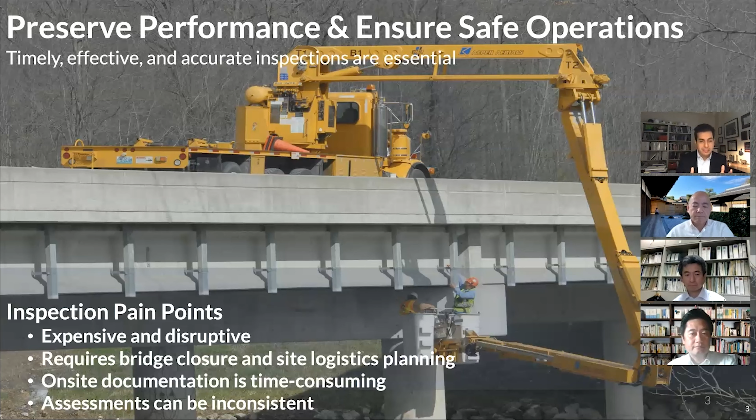The process of documentation for long has remained very time consuming when you consider that a lot of inspectors have to be an arm's length away from the infrastructure. And because of the time limited aspect that we have, and because we can't get all of our experts to visit these sites, oftentimes the assessments that we have can be inconsistent.

Over the past 5 to, I'd say almost a decade, there's been quite a few departments of transportation in the US that have led the charge in coming up with the requirements for improving this process of condition assessment. And out of that process, there are really 4 top goals that are being highlighted.

There's always a need for new procedures that can be easily standardized in terms of how you're documenting existing conditions, how we are communicating defects that we see and we analyze, and how we can follow up on recommendations that are being made by our inspectors.

Oftentimes, when we speak to Department of Transportation and with our colleagues in Japan at the ministry level, there's always a need for a unified system that everyone, no matter where they are, will be able to get access to the information, store it securely, and be able to retrieve that information over the life of that asset.

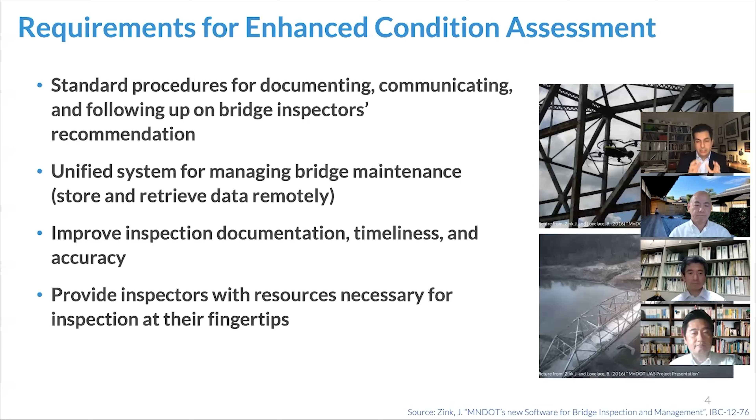Of course, many issues that we spoke about in terms of documentation, how fast we can do it, and the accuracy of the process are also pretty important to us. And on top of all that, we really want to make sure that every stakeholder engaged in the process, from that inspector to the owner of the asset, would have all the information that they need at their fingertips so they can make the decision at the right time using this actionable insight.

So what is the opportunity? Over the past decade, there's been a surge of visual data that's already being captured on all kinds of infrastructure assets. Whether you're owning and operating a bridge, whether you're engaged in the railway industry, whether you're involved in tunnel construction, there are all kinds of these images and videos being captured.

Sometimes we see photos captured with cell phone devices. Sometimes there are cameras that are being mounted on inspection cars, time-lapse photography, action cameras, and drones. Drones have been really transformative. And of course, laser scanning.

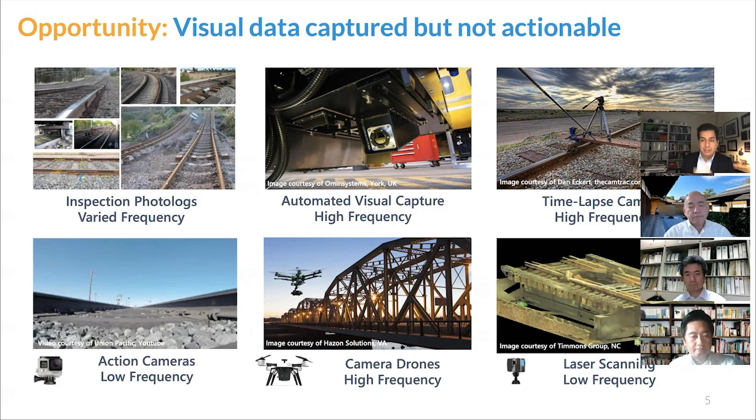So as a team, when we started working on this concept almost 10 years ago, we started looking at how we can expand on the value of visual data that we use for coordination and communication as the basis of our inspection. Among all these form factors of capture, the one that's been really transformative has been the application of drones. Camera-equipped drones are really easy to operate, and we've seen a surge of their application, not only in the US and Japan, but also around the world in many of the projects that we engage in.

In fact, Minnesota Department of Transportation, with Collins Engineers, actually published a report that shows when you use drones, you can immediately have cost savings associated with minimizing exposure of your inspectors to the infrastructure and the time that they have to spend in the field using special equipment. So obviously it's faster and cheaper.

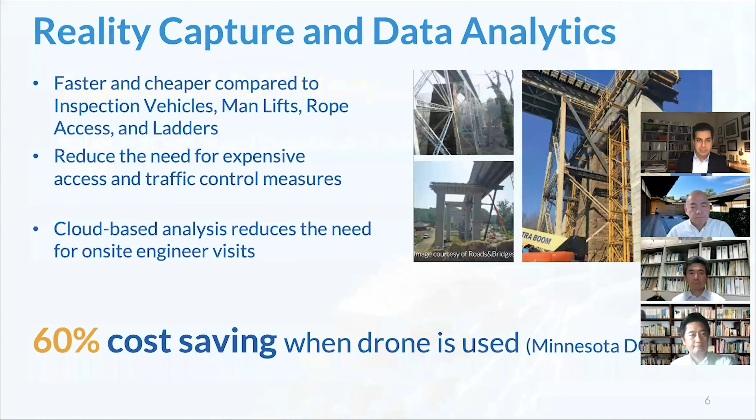It reduces the need for all kinds of access and control measures that we have to bring in from a traffic perspective. And when you supplement that with a cloud-based analytics platform, the requirement of having the engineer be out in the field would be dramatically reduced. So with all those values, we started working on this concept.

And back in 2016, almost 4 years ago, we teamed up with the Japanese Ministry of Land, Infrastructure, Transport, and Tourism to look into robotic-driven visual inspection of infrastructure assets. So with that, I want to pass it on to our co-speaker, Nita-san, to speak about their story of how the government of Japan came up with this initiative.

Nita-san? Hi. My name is Yasushi Nita, and I am in charge of policies regarding the introduction of robots at MLIT. Thank you very much for having this opportunity to give a presentation here today. Since the time is limited today, I'll focus upon the robot for the inspection of bridges. Next slide, please.

The government of Japan set up a new robot strategy in 2015 that aims to showcase Japan to the world as the most advanced robot society. This new strategy is intended to promote the development and introduction of robots in a wide range of fields, including manufacturing and related service, agriculture, nursing and medical care, social infrastructure, disaster response, and construction. Next slide, please.

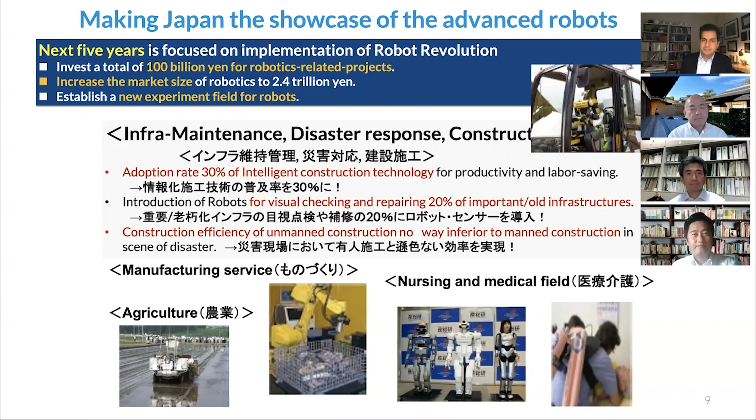This slide shows the overall picture of the project. We recruited inspection robots for 3 years and verified their functions on the actual site. For bridge inspection, we plan to certify the performance of the robot for the requirement. In addition, I'd like to propose a new inspection method using a robot to achieve more efficient maintenance management. In on-site verification, various types of inspection robots were proposed, exceeding 100 technologies. Next slide, please.

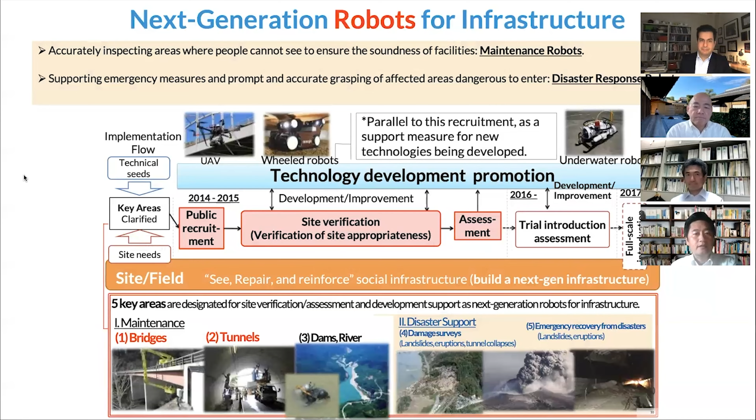On the other hand, the infrastructure of Japan is aging, and the working population is decreasing, especially in the construction industry. In the next 10 years, a serious labor shortage is expected due to mass retirement of people 55 years and older, which account for a third of the current labor force. Therefore, we think that increasing productivity is an important issue. Next slide, please.

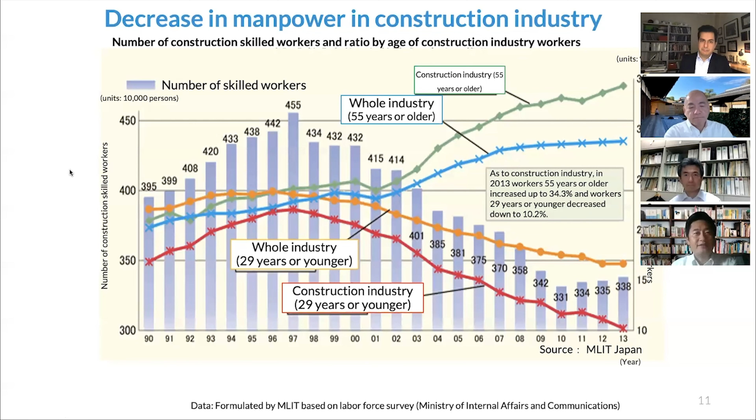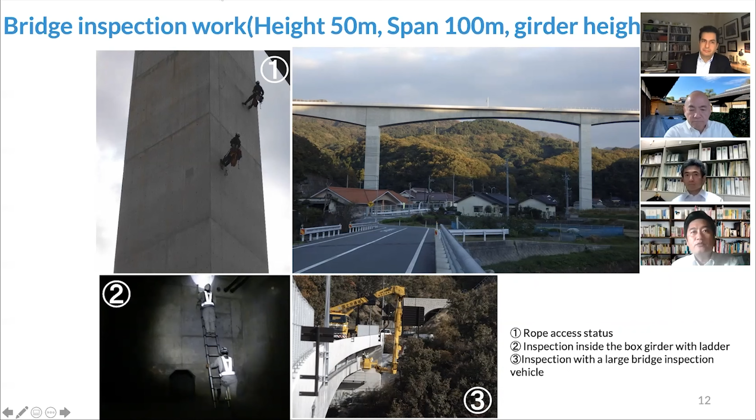This photo shows the bridge inspection work in Japan. The bridge pier is 50 meters high. The box girder also has a height of 10 meters. A close visual inspection is required for all parts. Number 1 picture shows rope access. Number 2 picture shows the inspection inside the box girder with a ladder. The third picture shows inspection with a large bridge inspection vehicle. Next slide, please.

Sorry. Next slide, please.

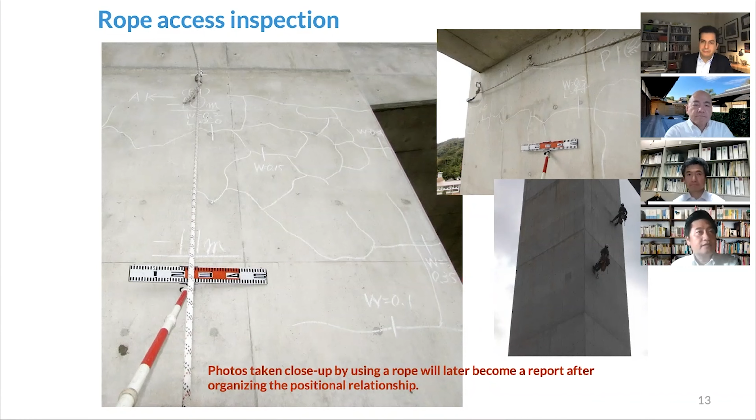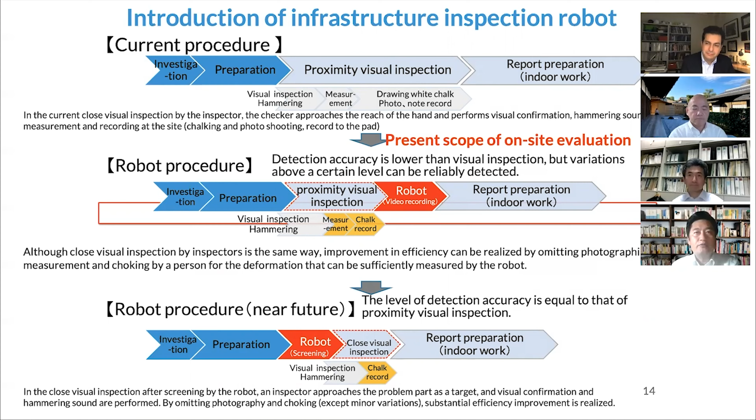The lower column represents a use case in the near future based on the robot inspection result. The person will be screened for a range of visual inspections. At this time, the bottom technology doesn't exist, but we expect it to happen in the near future. Next slide, please.

MLIT has started to include an AI budget from 2018. Inspection robots, unlike people, get a large number of photos and videos. AI can process faster than people to decipher large amounts of images from robots. In order to improve the efficiency of robot inspection, we aim to achieve high detection efficiency by AI.

Additionally, we will develop supervised data with input of experts, and we will promote the installation of an evaluation system. Next slide, please.

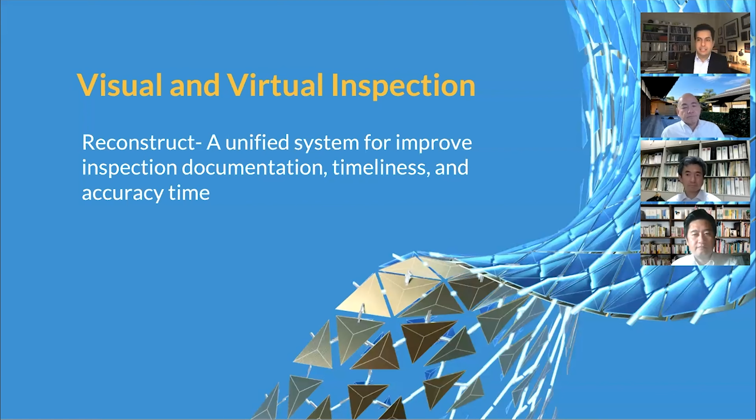So with that in mind, we started partnering with Murakawa-san back in 2017, and we had the opportunity of meeting with Nita-san in 2018 to start piloting our technology roughly 4 years ago for visual and virtual inspection. Our platform Reconstruct is a unified system that provides that process of improving inspection in terms of how we are documenting defects, the timeliness aspect of our process, and the accuracy associated with the performance that we have.

So broadly speaking, the Reconstruct platform builds on Autodesk solutions. We've been recently featured on Autodesk Forge blogs because this technology really builds on the Forge Model Derivative API capability in addition to parts of the Forge viewer. Our solution is also very tightly integrated with your BIM 360 solutions. And what that means is now all kinds of visual data can be brought into a system so they can generate a historical record of any of your infrastructure assets.

Our platform sits on Forge, and what that means is that you can also bring in your design information in 62 different file formats. Whether you're looking at your InfraWorks, Revit, Civil 3D, Navisworks file, or even 2D drawings, that can all be brought into Reconstruct, where it would be laid against the reality capture.

So basically images and videos would be automatically transformed into 3D models with a unique engine that is outside of the Forge box, the Reconstruct engine. And then it would be overlaid with the design information.

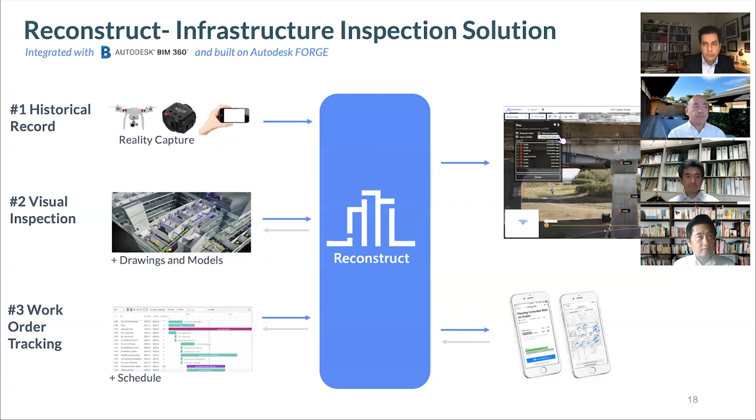And once inspection is being done, every single issue that is documented in the system can also be transformed into a work order. So you can actually tap into scheduling capability and create a work order immediately out of your inspection process. This entire system is accessible through the web and also mobile phones for individuals who are out in the field, whether it has to do with work tracking or visual documentation.

So again, when we started looking into this in terms of scaling, we immediately realized the number of bridges in the country of Japan are very comparable to the numbers that we have in the US. And what that means is that probably there are many different owners, and each owner, contractors and consultants that are working for them, they leverage different modalities of capture. Sometimes they take still pictures with their phone, sometimes maybe 360 cameras, like the picture that Nita-san showed, somebody walking into the girder box. And many times these days, we can tap into the application of drones, webcams, and scanners.

So we wanted to make sure that we can come up with a platform that is agnostic to how visual data is being captured. Of course, with guidelines, but agnostic to make sure every infrastructure asset can be documented. Going back to those needs, we wanted to make sure we have a web-based system that makes the data accessible to every party that's engaged in a project. All data, whether it has to do with the visual data, procedures, manuals, reports that are typically byproduct and or the product of the inspection process are correlated and linked. And everyone who is on site and remote, especially with COVID-19, they will also be able to get access to the information and interact with it.

So this will be a system-wide analytics capability that you'd be able to tap into to document your assets of interest, let's say a bridge. And every 2 years, every 5 years, when you're coming back, you'll be able to generate a new model, automatically have the model aligned against the previous one. So you would have a 4-dimensional reality model, fourth dimension here being time. And so that report can be organized around work locations automatically in a 3-dimensional scene.

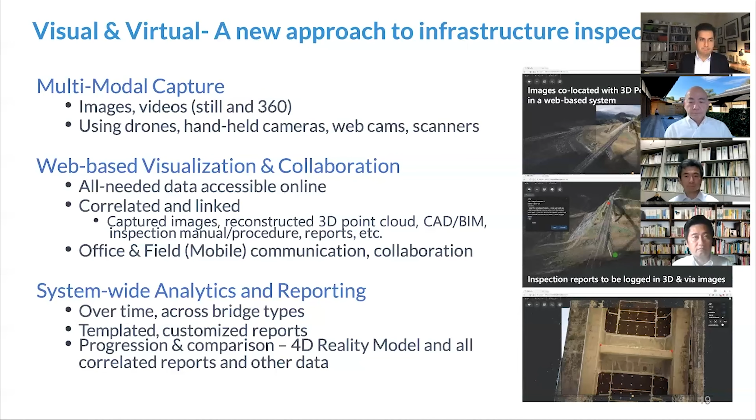So with that in mind, we extended the capabilities of our engine that can really take in unlimited amount of images and videos, and the form factor doesn't really matter. As you'll see in our handout, this engine can take in some drone pictures in addition to maybe some pictures that would come from a 360 camera or a combination with a video. All that would really result in a three-dimensional scene, a point cloud and a mesh model, and also 2-dimensional orthophotos.

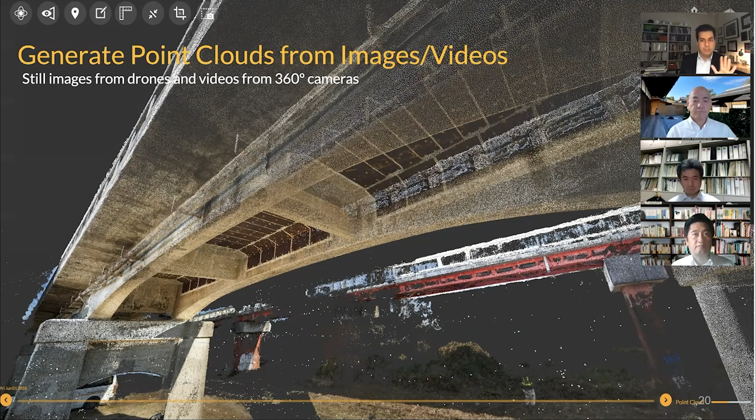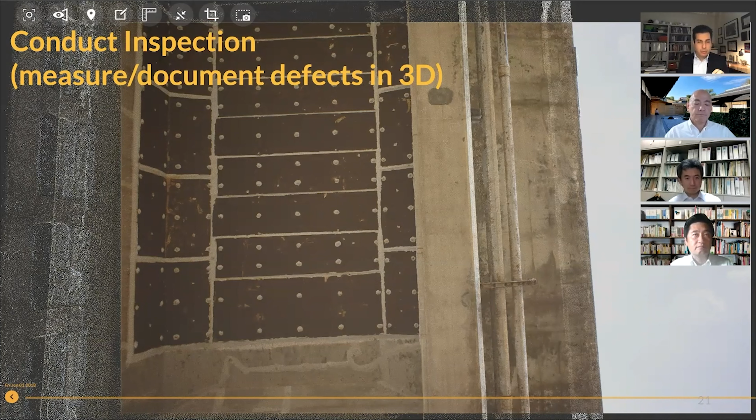Orthophotos that can show you top-down view, bottom-up view, side view, or you can create cross sections to generate these views. And what that means is that now you can click on any location you desire. The system would automatically bring the most relevant image. And now you would be able to dive in and perform your measurements in a three-dimensional scene from that picture of interest that you're looking at. So let me show you this video so you can actually see how the system really interacts. And I'm going to pass it on to Fukuchi-san in just a moment.

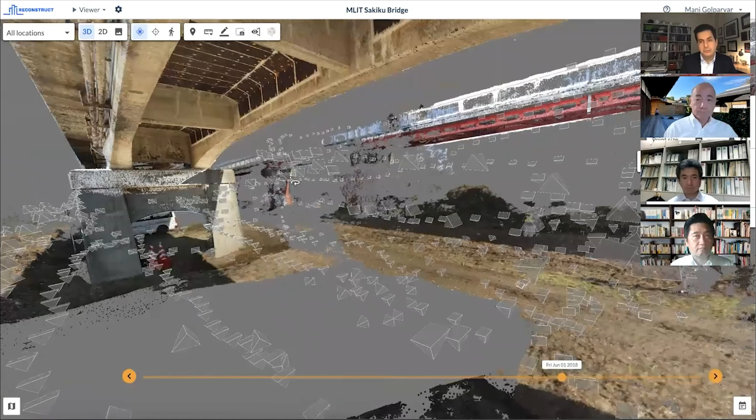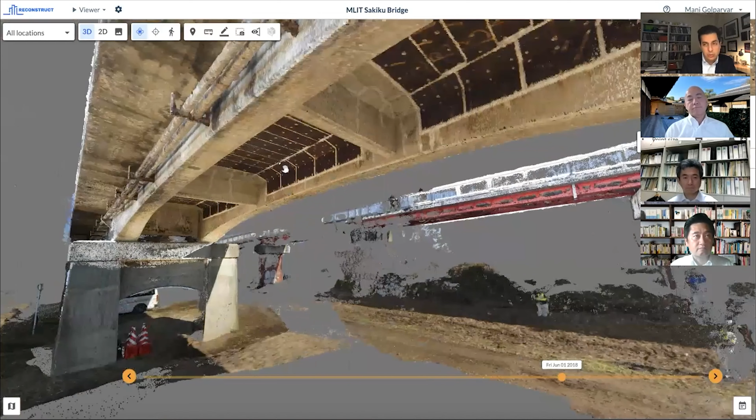So what really happens is for every bridge, we provide guidelines for inspection. Under the bridge, sides of the bridge, any location of interest will be documented. All these images are being processed into Reconstruct engine, and they automatically generate that point cloud, the mesh model, and the orthophotos that I referred to. So now the inspector can actually log into a visual system, and within the visual system, you can click on any location you desire, and the system would immediately bring in the most relevant image for you.

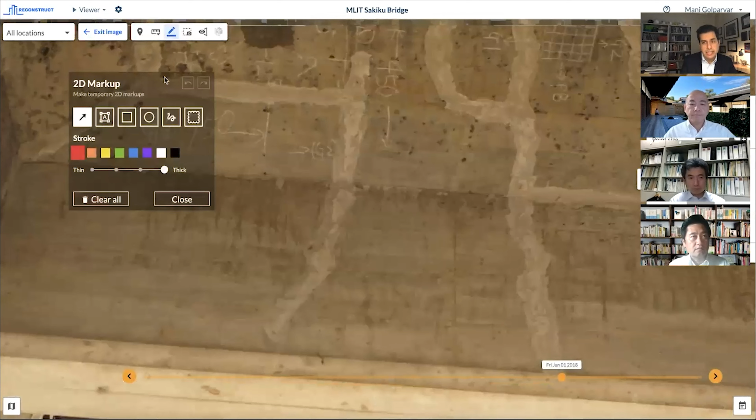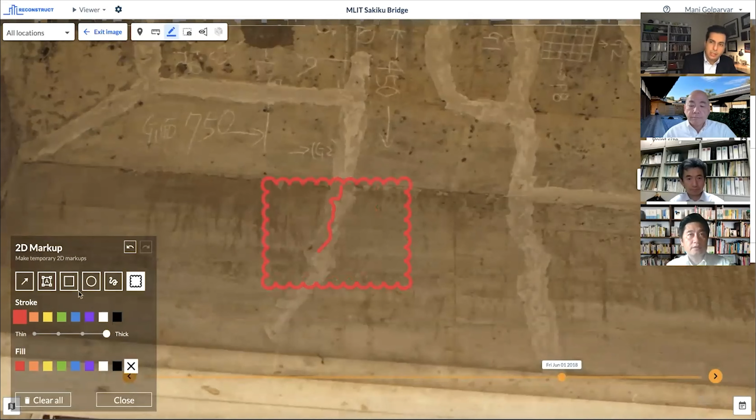We've actually posted some guideline in our handout that we developed this technology, making sure the measurements are really accurate. The requirements for inspection accuracy is usually millimeter or sub-millimeter. And what it all means is that we also need to make sure markup capabilities are done. So we've tapped into some of the Forge capabilities to bring that data into the scene. The challenge was really interacting with the point cloud images and design data, so some novelty on what is being built on top of the Forge viewer here. So all that data, again, enables you to perform your measurement in a 3D scene.

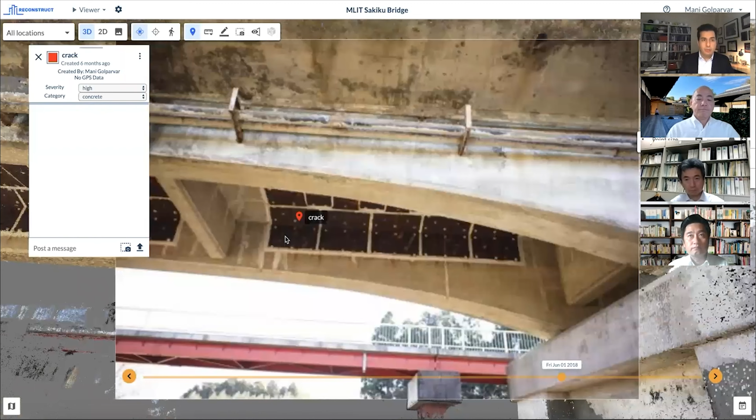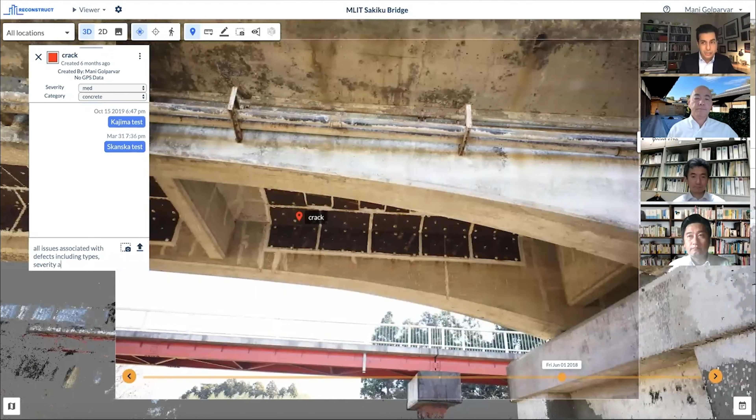When you perform your documentation, you can create custom forms. So you can say who's created that inspection log, what is the XYZ if it has GPS data, or it doesn't have GPS data, and you can have customized forms that can say how many types of defects have been detected, what type it is. In the case of MLIT, 26 different types. And then you can also associate severity. There's a console that you can document information associated with that. So it's basically inspection logs, recommendations on how that issue can be addressed, or it can be a platform for communication that over time really shows you all the logs of communication across various project stakeholders.

Once this process is complete, you can also attach reports, manuals. So again, all your inspection data can be localized against one location in a three-dimensional scene, and anyone coming back in the future can easily click on that location and all that information comes back. From every issue you document, you can immediately create an activity from a work order perspective. So it really creates that schedule of systems and you're able to use that.

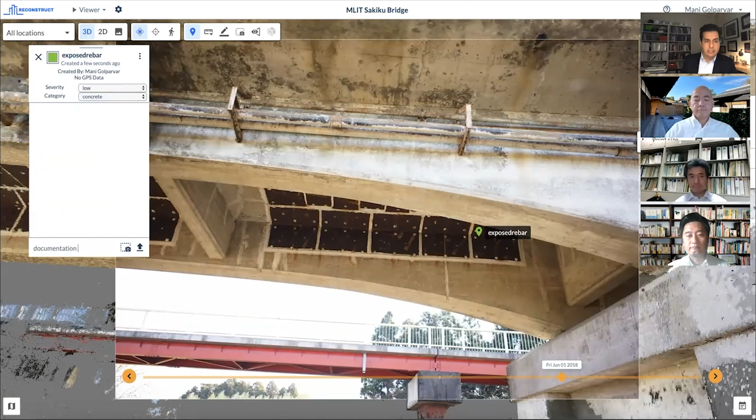So again, pinning would be, you click on a location. If you have a list of default types of defects that you want to be detecting, you can grade that, and all that would remain in the platform. So that being said, we worked very closely with MLIT and some of our partners here in the US to devise a workflow that we can gradually introduce this capability to scale. And this has actually been used on hundreds of projects already.

And what that means is we need to have proper guidelines on how visual data can be captured. In the case of MLIT, there are strict requirements of achieving 0.2 or even 0.1 millimeter to detect hair cracks. So the location of images against the structure, viewpoint, all that really matters.

Once the images and videos are captured, they can be brought into the Reconstruct engine, where they will be automatically processed into three-dimensional points. This is where we tap into the Forge derivative API, where now we can import 2D and 3D design information. And that's where we very closely worked with Fukuchi-san from Autodesk. Fukuchi-san?

Yes, so based on Forge, the inspection workflow is quite simple. With single sign-on, we can integrate with BIM 360 access. We use the access, and then once we capture the photos, Reconstruct automatically processes the point cloud, and the photos are overlaid onto the 3D point cloud.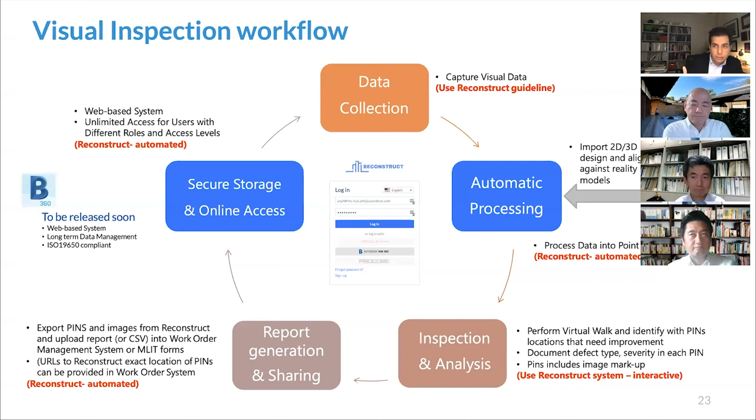If you come back 5 years from now, you can redo the new capture, and the AI engine embedded into Reconstruct's computer vision capability would automatically align the new model against the previous model, even if you don't have any GPS data. Similarities of the scene enable us to do that. So I didn't show a whole lot of examples of how design information can be brought in.

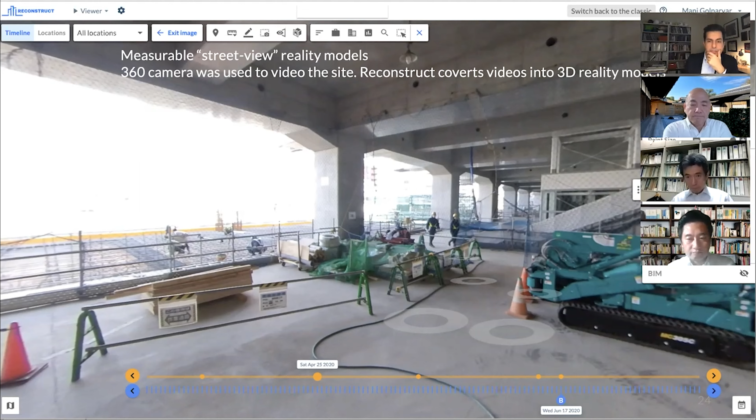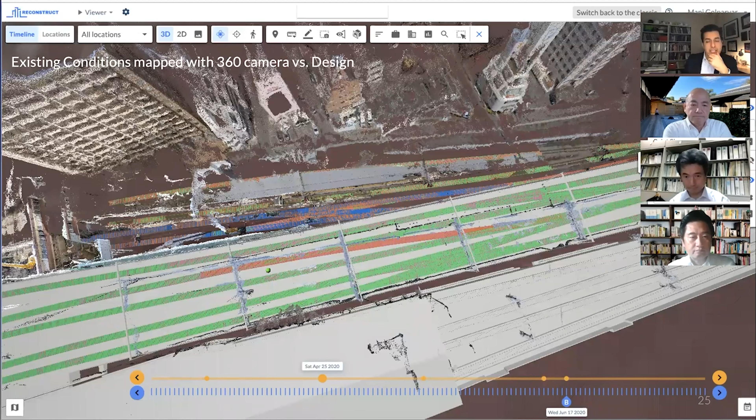So here's just an example. This is a retrofit of an existing infrastructure asset. So you're looking at the 360 video documentation that is mapped into 3D. In this project, also laser scanning point clouds are very important in the system, mapped against 3D design information.

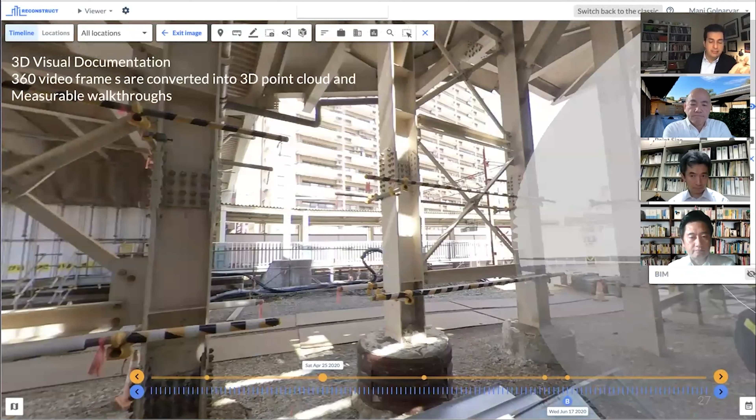So what it means is that now you can go into any image view that you desire, and from that image perform your length, area, volume measurement directly from the image, because it's all in 3D, and have your design information overlaid against it. So if your inspection is also accomplished together with an actual retrofit on a job, you'll be able to contrast the design against that. Or if you want to track changes against design over time, this really shows you what is there versus what should be there.

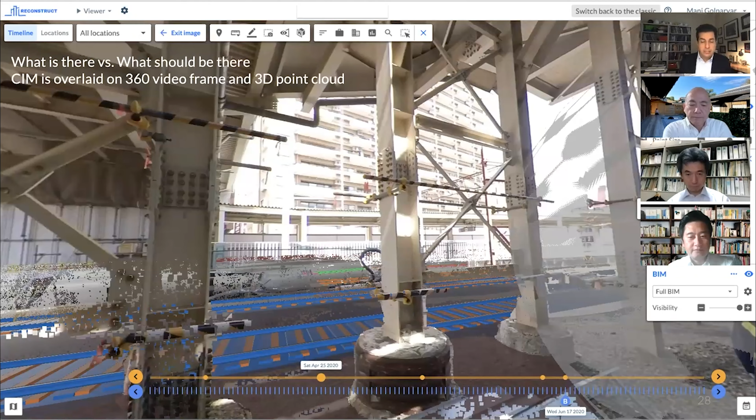So what it all means is now the system organizes photos across a three-dimensional viewer and pins them into a location in 3D. You can dive into every image to see fine details and measure any dimension you want directly from the images.

If you look into our Autodesk University handout, we've provided guidelines on why image-based inspection is accurate, and perhaps even more accurate than directly using point clouds and mesh models. So we've actually done a comparative study with a number of experts, and we've shown that by a few orders of magnitude, accuracy of measurement can be increased if we use the image as the interface.

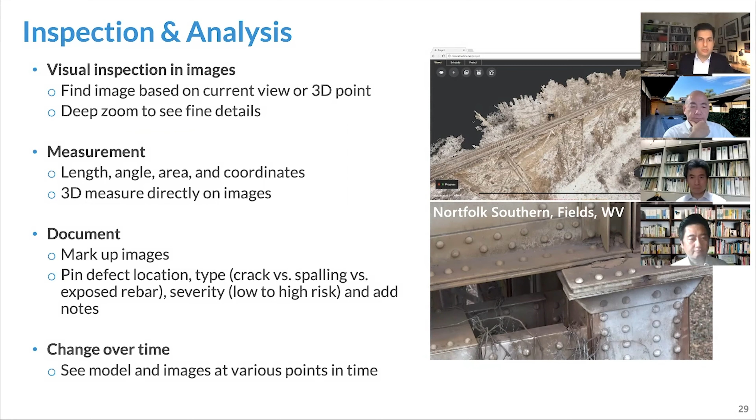Markup capabilities are there, so issues can be directly documented, and as we showed you in the demo, you can continue doing the markup by documenting all defect locations. And again, changes over time would be documented as well. The beauty is that now reports can be automatically generated. They will all be preserved online.

They can be emailed. They can be text messaged live if you desire to do that. And all of them are really being attached to a 3D location. That means if you want to stick to a Word document workflow, you can download them. If you want to generate MLIT compliant reports, you can also download them too. So what does that workflow look like?

Oftentimes when it comes to generating reports, once we've done our inspection, we want to take the reader of that report to specific viewpoints that we've always been generating, right? We want to have a side view, a section view, a below deck view where we really show the result of our inspection. So we worked very closely with Nita-san and Murakawa-san to have a workflow where the user can define the most informative views that they want to include in the report.

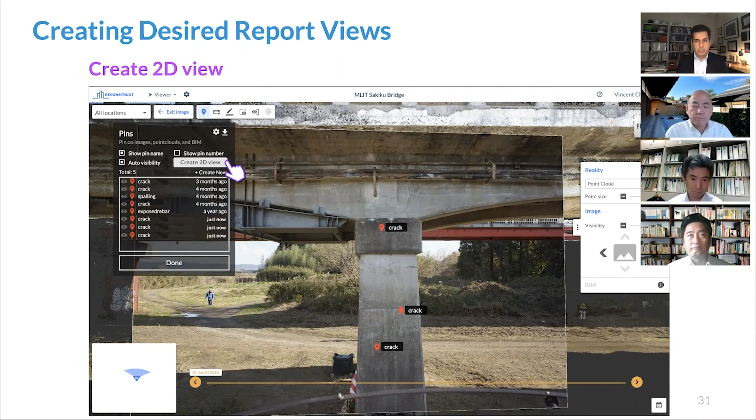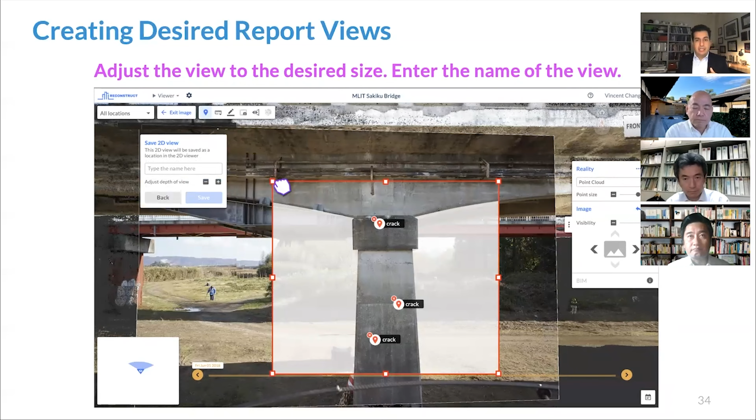That means, for example, we go to this bridge pier, and then we see there are a number of cracks that are already documented in 3D. What we would do is create a specific view. That means we would click on a number of locations and say, from this viewpoint, I want to generate a 2D orthophoto that can be supplemented into the report. So the system runs that view and automatically generates an orthophoto. As much as that information is in 3D, it gives you access to that information in 2D.

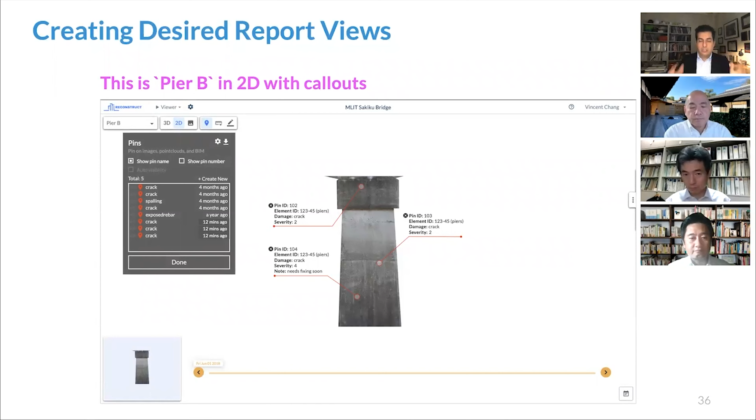And once you activate your issues, everything that was documented in 3D would automatically pop up in 2D. You can customize it and say, in these views, I don't want all the information. I just want to have the element ID, the type of damage, the severity of that. The rest of the information can be embedded into the report, but in this unique view, I want to have that information. So this is now being brought into application to generate official reports by MLIT.

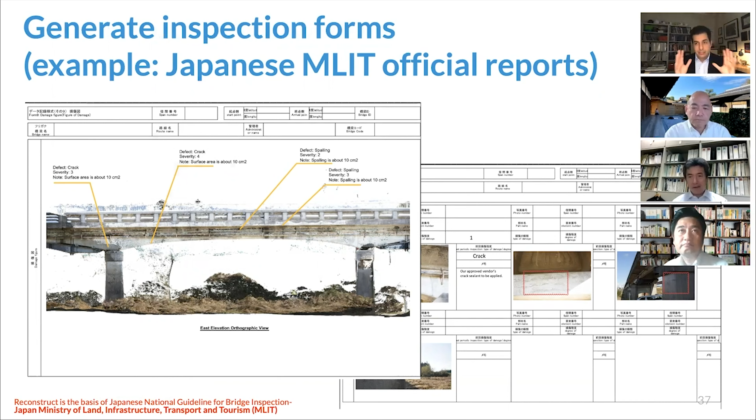For example, this is Form 9 and Form 10 that comply with the new requirements. Again, automatically, once you've done your visual inspection in 3D, you would automatically generate these reports that are 2D oriented, or specific images with that information. So what does it all mean?

That means with one workflow, you can also improve the process of analytics. All that information is being accessed via the web. Information is being organized in GIS form or can be project cards. It's all being secured on the cloud, and it can be customized. We specifically customize it for MLIT and also a few other agencies that we work with, and migration of existing data is possible because it relies on existing data.

You can bring your old data into the platform and create that historical record of the project that we mentioned before. You can always come back and perform later inspections.

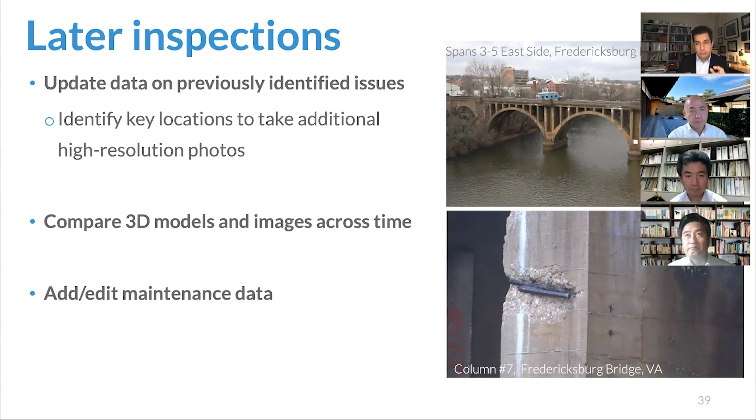You identify an issue, you can mark it up and say, I want to have a team go back and do one more inspection if that happens. So you can go and take new images, generate a new model. The new model is comparable against the previous model, so you can compare before and after. And if you desire to extend the application of this model to be used for operation and maintenance, you can edit that information and store all that within a three-dimensional scene.

So what is really the value proposition? This is something that we had the pleasure of working with MLIT to assess. So as Nita-san mentioned, this was a vision back in 2018, but that vision has been realized today. And there are many groups from consultants to contractors to owners that are working with us on leveraging this opportunity.

And what that means is instead of having individuals out in the field, we can minimize their exposure to risk and cost by looking into automating the process of capture, bringing that data back into a web-based environment in a 3D form. So detection, measurement of the defects can all be done in a three-dimensional scene, have people record them, and automatically generate these reports. And that all really forms the basis of the near future.

With this data and integration that we have with BIM 360, it really opens up the room for AI algorithms. Our team and many others are working on automated defect detections. But if you really want to scale it, let's just pick MLIT. You need to make sure that this really works for all different types of defects, 26 different types, and can automatically find severity. And that requires supervised data, as Nita-san mentioned. And this platform being used at a scale, at an industry level, is now enabling us to capture that data.

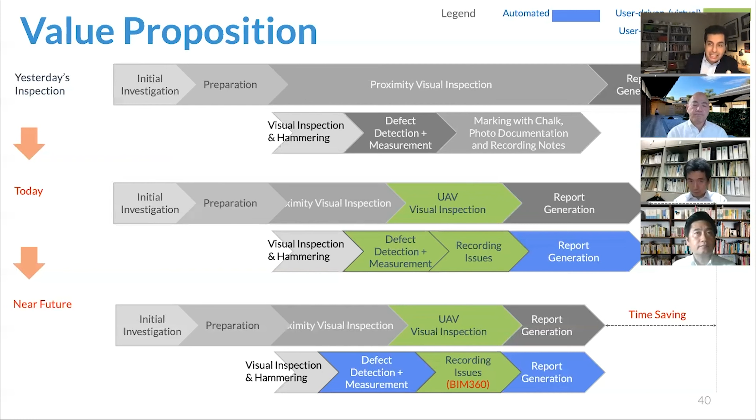So we're all excited that in the next 12 months, we'll be able to bring a lot of those capabilities based on a massive amount of data that's being annotated by the experts, and it can be used as a base of training AI engines. It all comes together into that same vision that Nita-san showed you earlier. Now we can go ahead and perform that inspection that used to happen out in the field. We're just limiting that to the imaging process, judgment of the defect type, location, and organizing all that report, all that time-consuming process that we have to spend. And that can all be automated, which are some of the goals that we worked on specifically with MLIT.

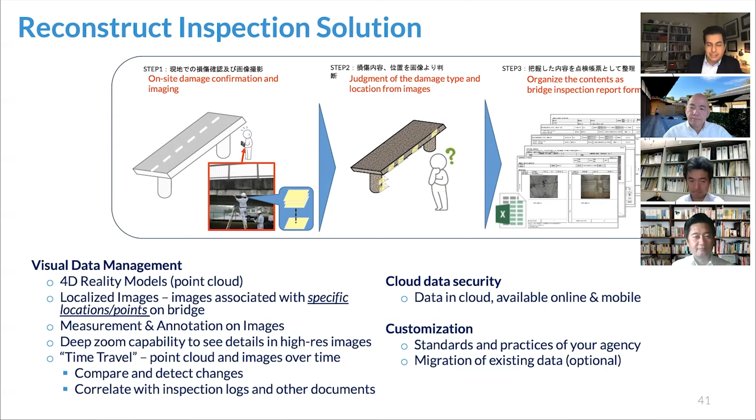So again, it gives you access to four-dimensional reality data, localizes that information, and it gives you that time machine for inspection that you can compare and detect defects and even perhaps forecast them when you tap into AI engine capabilities. And again, it can be customized. So if you have different practices, if you want to migrate your existing data, that would be something that you can specifically work with this Reconstruct engine that lives on Forge capabilities.

So what are the takeaways? We've shown you an end-to-end workflow, a unified system that taps into your existing data to improve the process of inspection. It minimizes double data entry. It minimizes time to generate reports. It makes it more objective and makes it more accurate. You can go back to the data over and over and visually verify every information that's been provided to you.

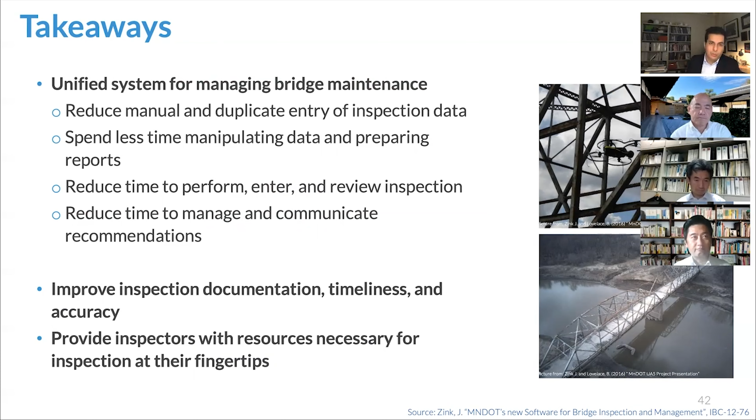And for those inspectors that want to interact with the data more and more, everything is at their fingertip. They can upload existing information, manuals, recommendations, and store them in a three-dimensional scene as much as they can generate owner-compliant reports for inspections. So that said, that's really our presentation for bridge inspection with aerial robotics that can be supplemented with 360 cameras. And this was really mostly from a workflow perspective.